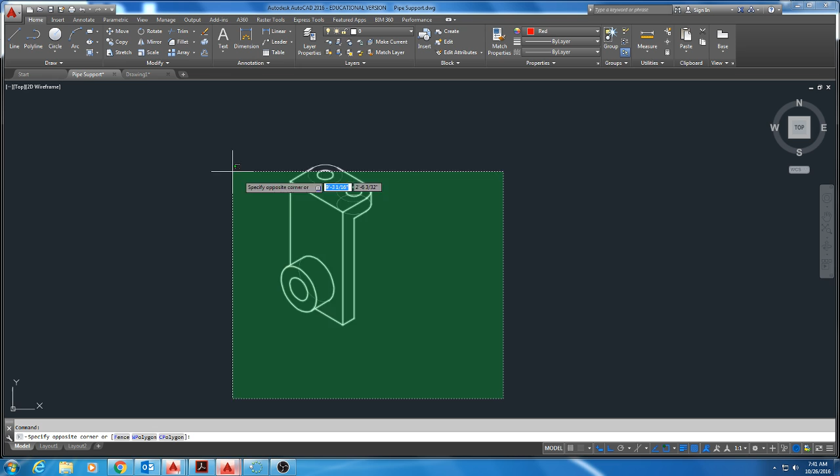I'm just going to draw it over here to the side. So all the dimensions that we need are over here on this drawing. I have basically the shape of what it looks like, and I may flip back and forth a couple times.

This drawing is an isometric drawing, meaning these lines are drawn at 30-degree angles. These lines are straight up, so it has vertical lines, but no horizontal lines throughout the whole thing. Everything that might normally be horizontal is actually going to be at a 30-degree angle right here.

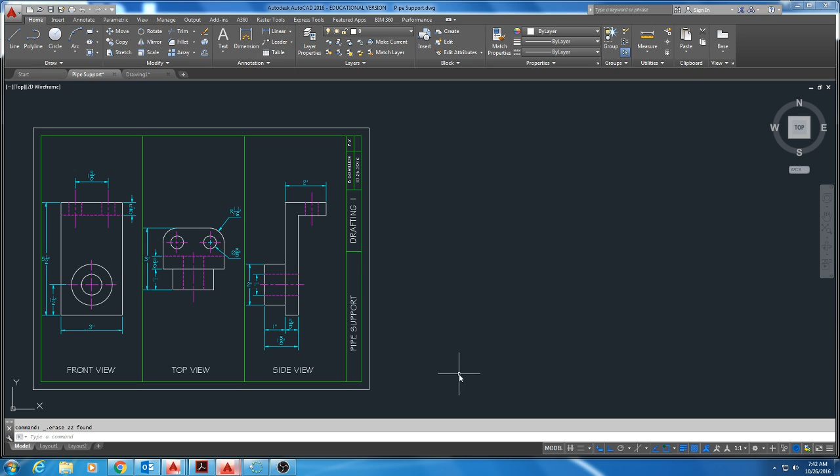There's an easy way to draw in 30-degree increments in AutoCAD. Right down here there's a button called Isometric Drafting. When you click on that, your mouse cursor changes, and then when you draw lines, if you have ortho on, which is here, your lines will automatically snap to 30-degree increments, meaning you can draw a line straight up, and then at this 30-degree increment, all the way around.

Except sometimes you can't snap onto certain degrees. For example, if I wanted to draw this line right now, I could, because it would just be this direction. However, if I wanted to draw this line going up and to the left, I actually kind of can't. It just goes to the bottom left, this direction.

So what you have to do is hit a function key, F5. What that does is it flips your mouse, and it also allows you to draw at different angles, but they're still at 30-degree increments. It's just that sometimes you have to hit F5 if you can't get the specific angle you're trying to get.

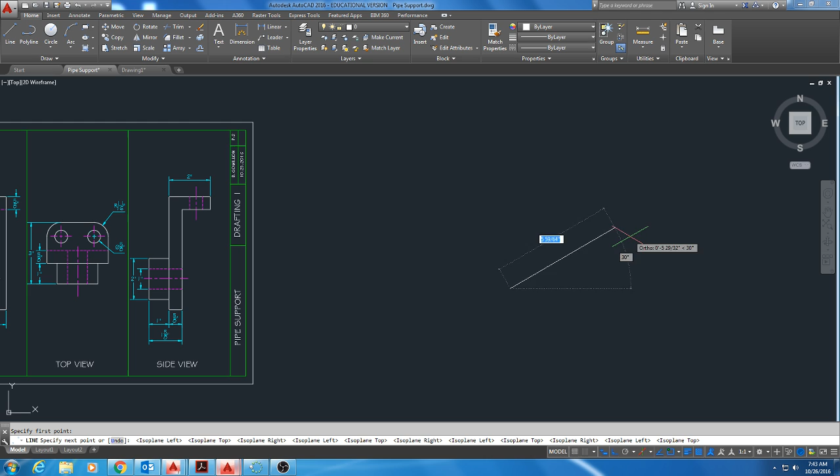So I'm going to start from this corner and build this front face as if this circle wasn't here, kind of like we did with the front view. So this line is going to be 3, and then I can't draw a line straight up, it's not letting me. I have to hit F5, and then it lets me draw one straight up.

So this is 5.5. And then I'm going to come back down this way. I have to hit F5 again to flip my cursor. 3, and then back down to there. So that's kind of like this front face right here.

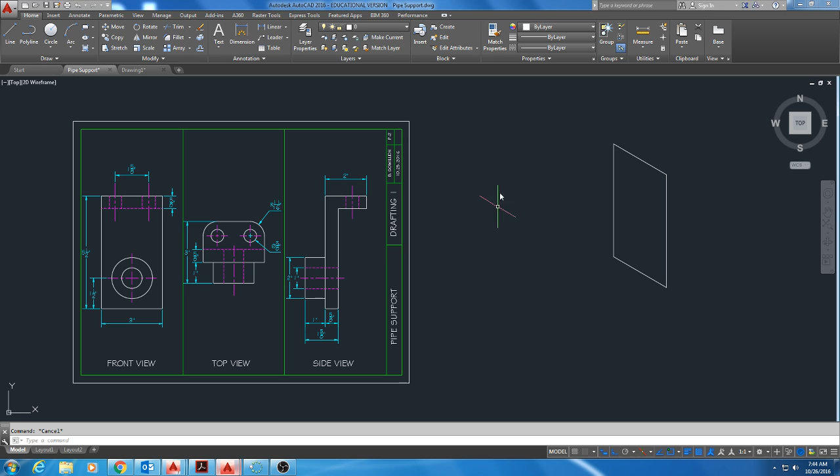And then I'm going to do this top, kind of like this piece right here. This whole lip, without the curve, is 2 right there. So I'm just going to draw a line from here, hit F5 to flip my mouse, 2, then it comes this way 3, and then back that way 2.

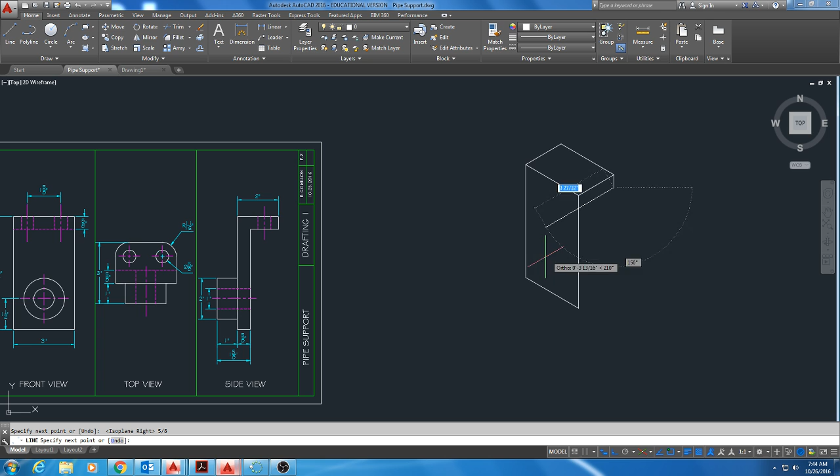This lip has a thickness of 5/8 of an inch. So draw a line here, down 5/8. And then I'm going to do the same thing on the bottom, so I don't have to do any math, the same way I did on the side view. So 5/8 here, and then just come up, and over until they cross, and then trim.

So that's the basic shape of our little base piece without the curves. These circles—we're going to have a bunch of curves here. You can't actually use the fillet.

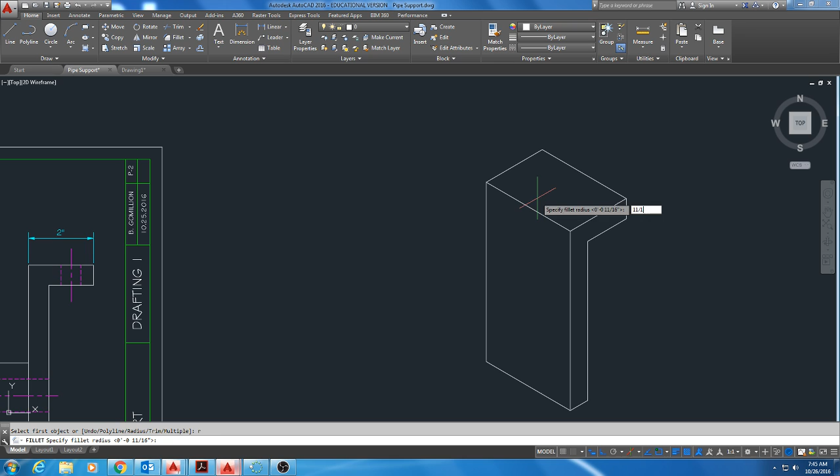It might seem like the best way to curve this off would be to use the fillet tool with a radius of 11/16. But if I do that, that side looks okay, but then when I get to this side, you can tell that that's definitely not right.

So fillet really only works for drawings that are straight-on views, like an orthographic view, like these three are. It doesn't really work for isometric or oblique views, 3D views like we're drawing here.

So what you have to do is actually create iso circles, and to do that you type ellipse, enter, and then down at the bottom click iso circle. And then it kind of works just like the circle tool, where you just click somewhere and drag your mouse out, and then you type in the radius.

But you can also hit F5 to flip the direction or the face that the iso circle would be drawn on. So you could have it flat like that, or sitting up on this axis or this axis. There are 3 different ways, and you just hit F5 to toggle through all of those.

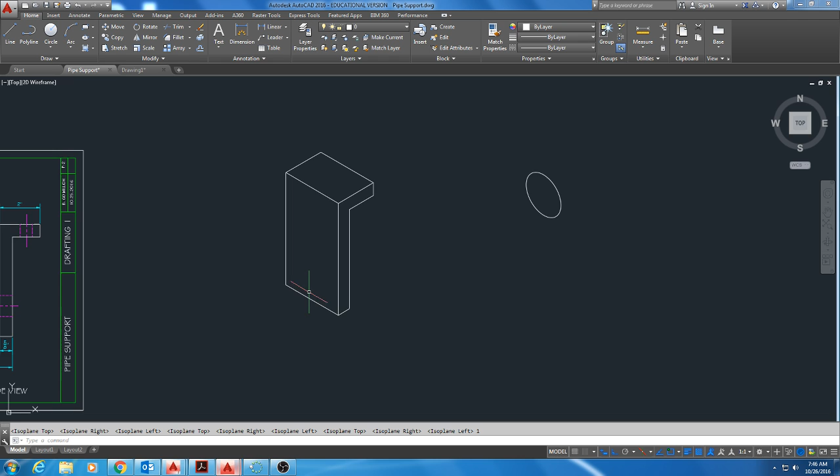So for example, if I wanted to draw this one in the front right here, I would want it to look like this, and the radius of this front circle, I believe, is going to be 1. So this is my larger circle that goes right here. If I draw a line from the middle up 1.5, that'll give me the location of this.

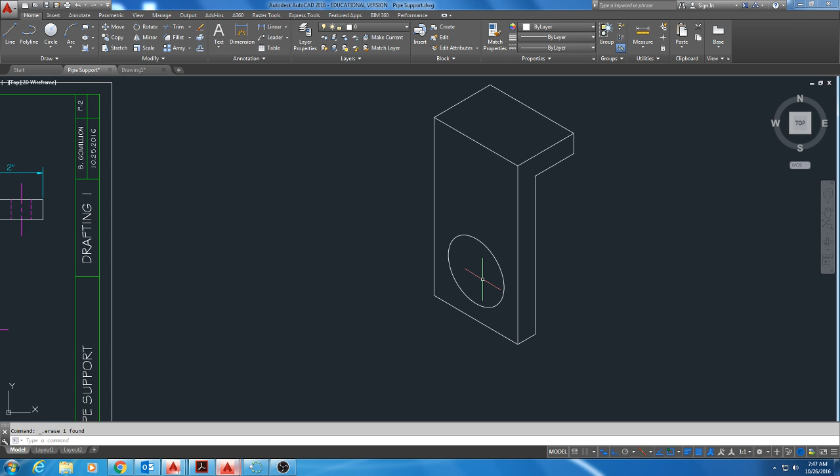So I'm going to draw a line from this midpoint up 1.5, and then move this circle to that location. I could have drawn it there in the first place, but I was demonstrating over here. Okay, so now I have a circle there, and then there's another circle. So I'm going to type ellipse, enter, and I don't have to click down here. I can just type I, enter, choose this center for my existing point, and do 0.5 for that circle. So now I have both of those.

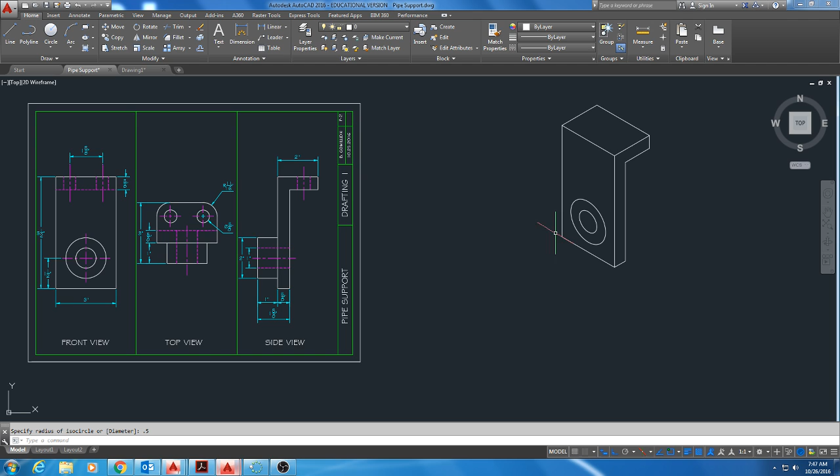Now this feature actually is kind of extruded from the object a bit, as you can kind of see in this picture. And the distance that it's extruded is shown on the side view, which is 1 inch here. How we show that in this isometric view is we use the copy tool, and I'm just going to take both of these circles and copy them. I don't want to go this way or this way. I have to hit F5. I want to copy them this direction because that's the way the extrusion actually happens, and as I move my mouse this way, I'm just going to type in 1.

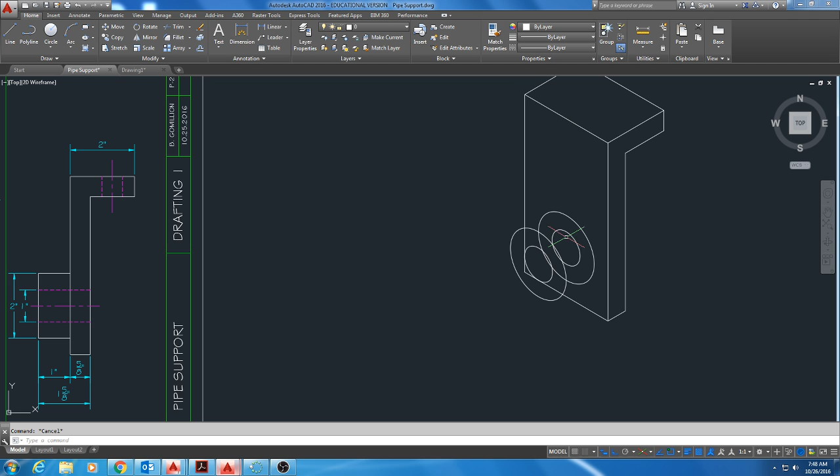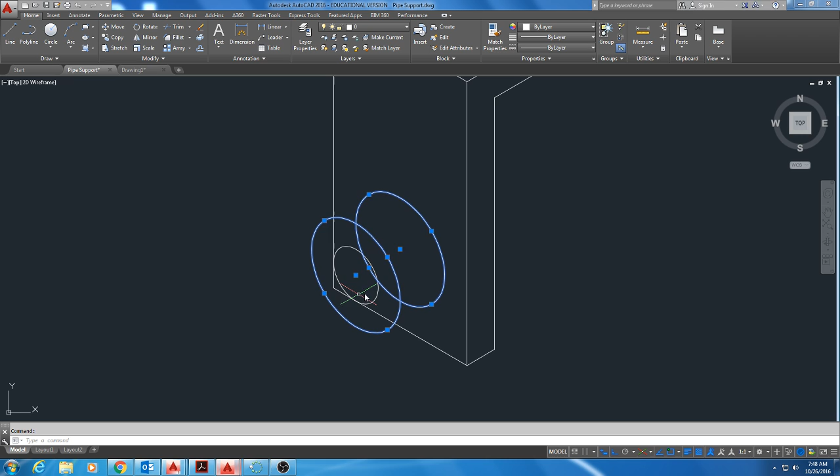So now I kind of have a copy. I'm going to erase this because that actually won't get seen, but I have a copy of this circle right here that's exactly 1 inch away. If I were to draw a line from here to here, it should say 1. So next, what I do is just draw lines from the quadrants of these circles to make it look 3-dimensional like this. These are just an object snap, quadrant to quadrant. So line, quadrant, quadrant, and then on the bottom, quadrant to quadrant, and then all that's left is just trimming.

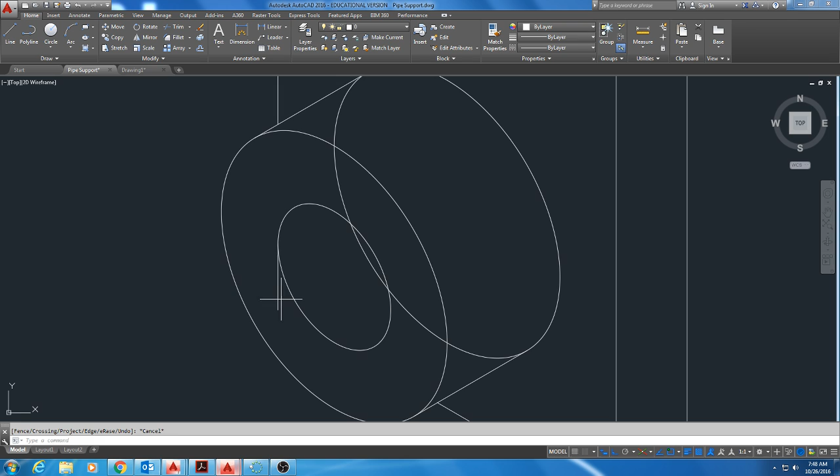So if this object actually protruded out, you wouldn't see this base here anymore. So I'm just going to start off by trimming my lines, and then you wouldn't see this part of this first circle that we drew. So I'm just going to trim that circle next, and then that's our little shape. It's assumed that this circle goes all the way through the object based on these 2 hidden lines. Alright, so that's the bottom piece. What's left is these 2 arcs here, or these 2 curves, and then these 2 holes that cut through the object. So I'm going to start with just these.

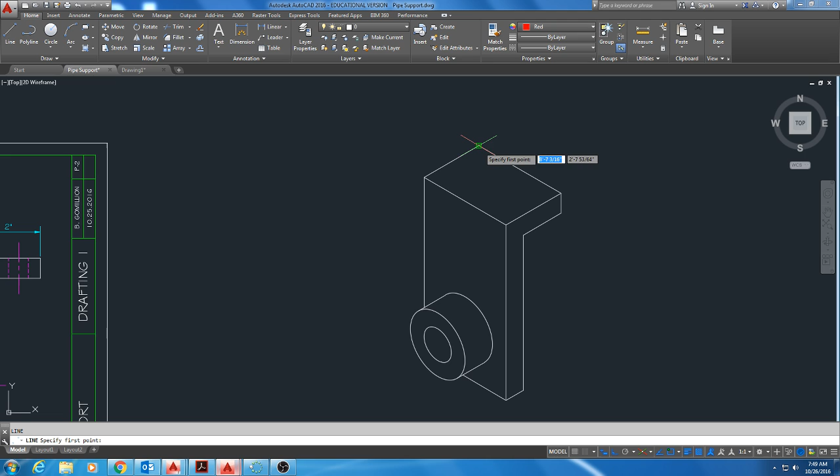These curves, or the fillets rather, have a radius of 11/16. So to find where those go, I'm going to change my color to red. All you need to do is start from the corner and go 11/16 this way, and then 11/16 this way. This will get you the center of your iso circle right here. And I'm going to do the same thing on the other side, 11/16 this way, and 11/16 this way. And now, I'm going to change my color back to by layer.

I can type ellipse, enter, I, enter, click here, and then go to there. Do the same on the other side. There to there. And the radius of this will be 11/16 because that's how long this line was. Now I can erase these, and then just trim these circles, and then trim the lines on the outside.

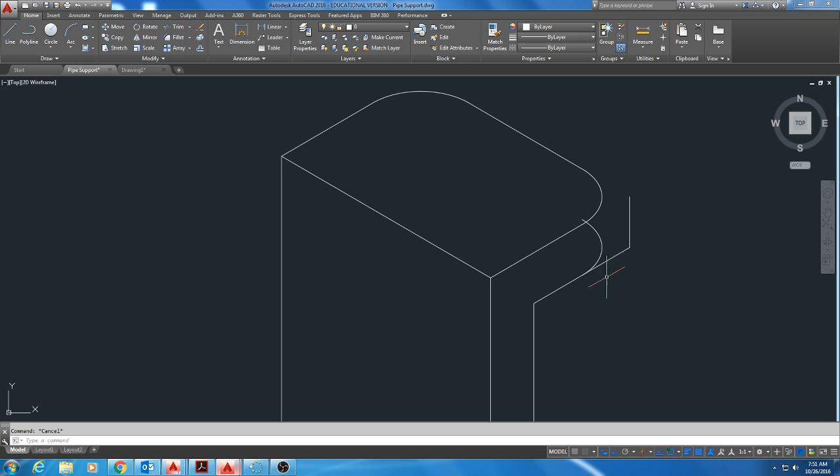So what happens in the front here is I actually have to bring this curve down, make a copy of it straight down, because the curve also happens on the bottom lip right there. This was a distance of 5/8 because we did that earlier. So if I just copy this curve down 5/8, it should put it exactly in the right spot where that line and the curve line up. And then draw a line from quadrant to quadrant, and then trim the curve that's hidden, and then I can trim that and erase that. So I'm left with that.

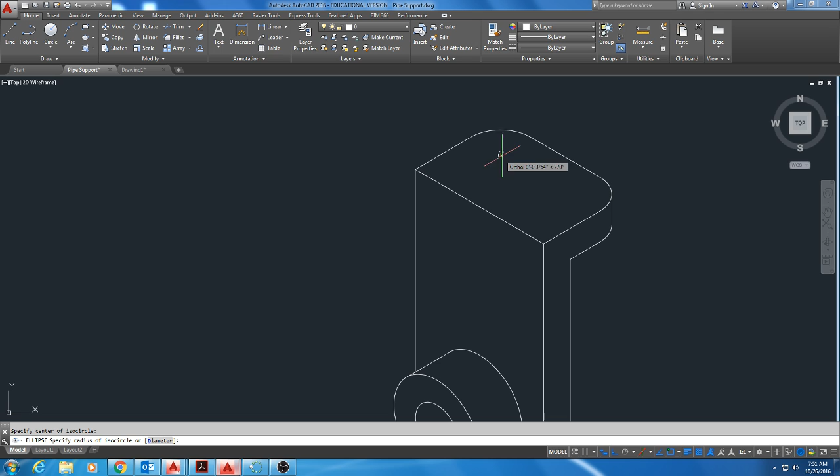If this is right, that should be 2. Okay, and this won't say the right radius when you click on it after it's already in, but this is correct. And then the only thing that's left is creating these circles, which have a diameter of 5/8. So I'm going to do ellipse enter, I enter, and they have the same center as these circles. So as long as I have center object snap on and click right there, hit F5 to flip it so it's on the right plane.

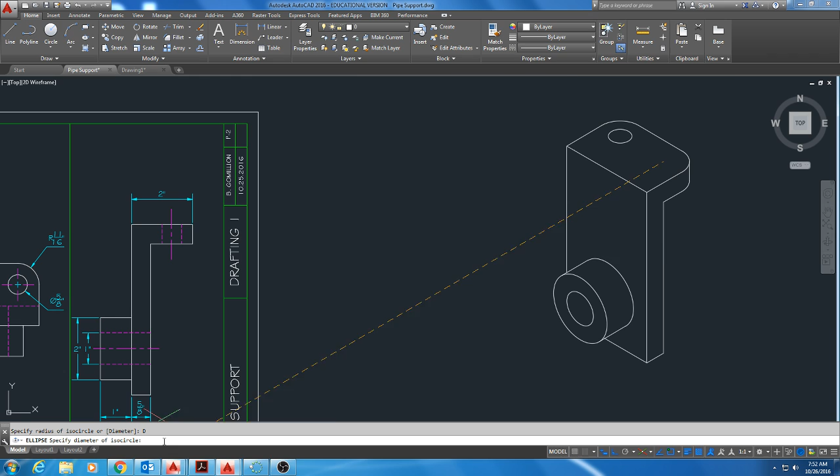And down here, since I know the diameter of the circle and not the radius, I mean, I could know the radius if I wanted to do the math, but if you ever just want to type the diameter instead, you can click diameter down here. That way you can just type 5/8 and that'll give you the correct size circle. So again, that's ellipse enter, I enter, hover over here, click on that, then click down here diameter, and then type 5/8, and that is the shape.